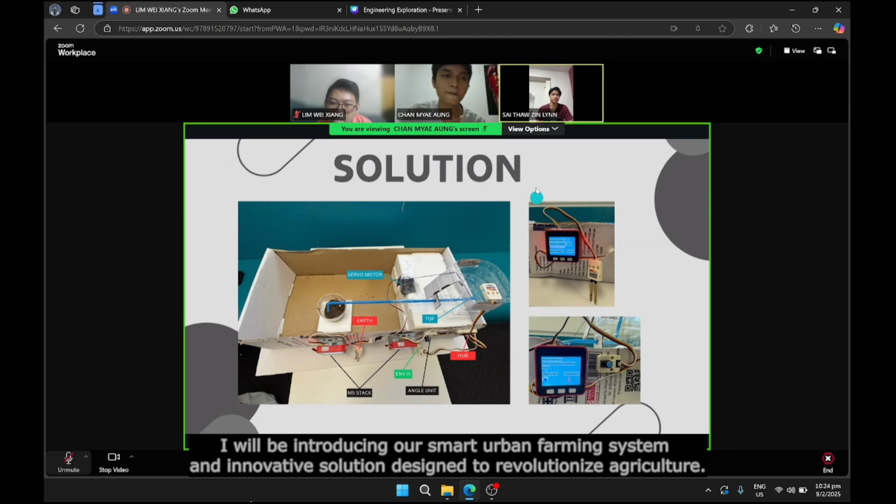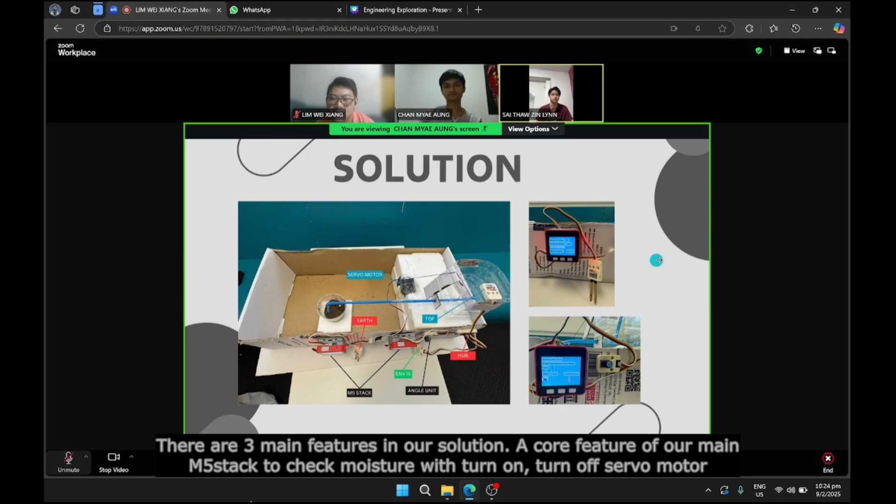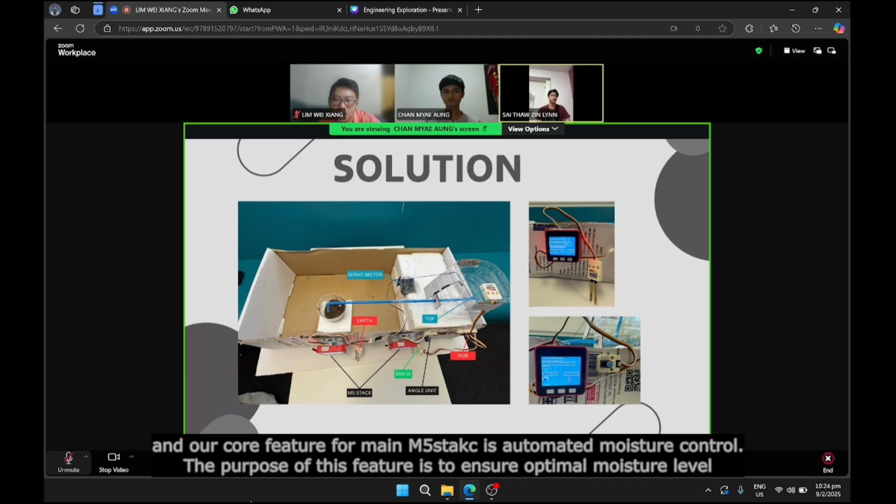Okay, now I'll be introducing our smart urban farming system, an innovative solution designed to revolutionize agriculture. So there are three main features in our solution. A core feature on the main M5Stack to check moisture with the servo motor. On the second M5Stack, we can check water level and adjust temperature depending on the moisture value received from the main M5Stack. And our core feature for the main M5Stack is automated moisture control. The function of this feature is to ensure optimal soil moisture levels by automatically activating or deactivating the water motor.

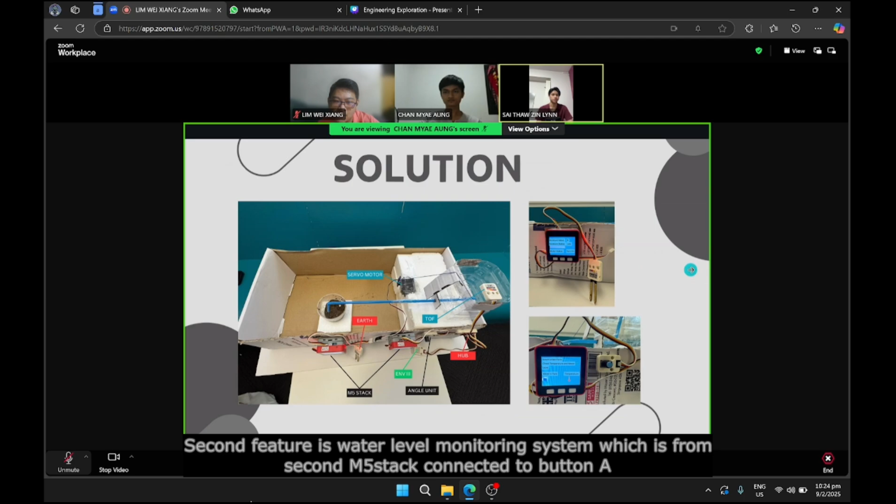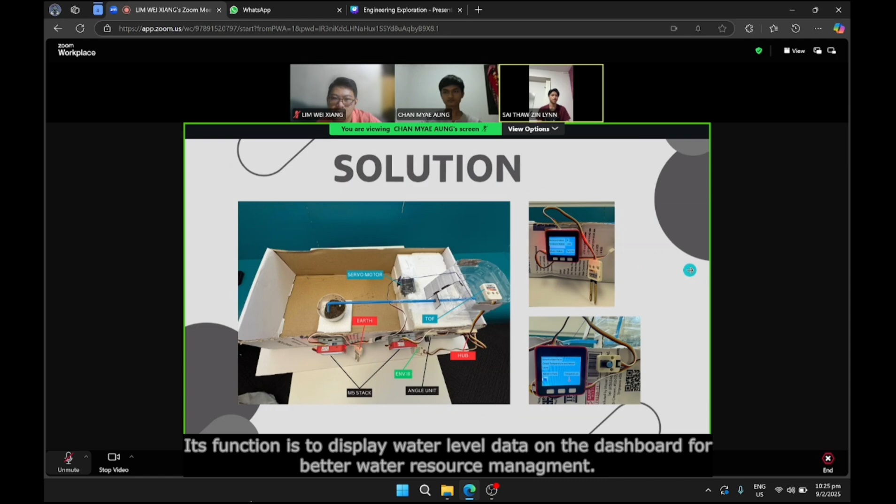Second feature is the water level monitoring system, which is from the second M5Stack. We can connect it with button A. Its function is to display water level data on the dashboard for better water resource management. And last but not least, we have the adjustable climate control feature, which is also from the second M5Stack, connected with button C. This will adjust farm temperature manually based on moisture data received from the main M5Stack.

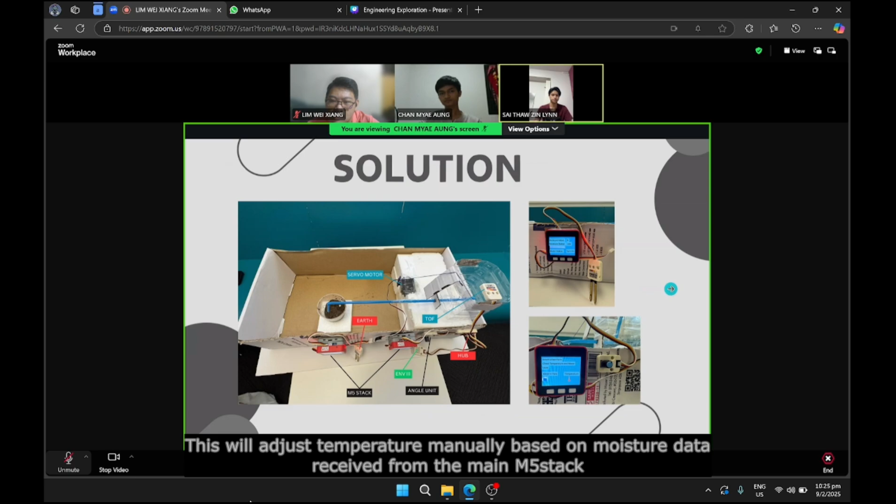So let's see what components we use for the project. We have two M5Stacks, the main M5Stack and secondary M5Stack, and one earth sensor and one servo motor and one environmental unit and one angle unit. And the last one is the power hub. And then let's take a look at our solution in more detail. Our system consists of three key features: an automated watering system, a water level monitoring system, and an adjustable climate control system. So let's take a closer look at how each component works.

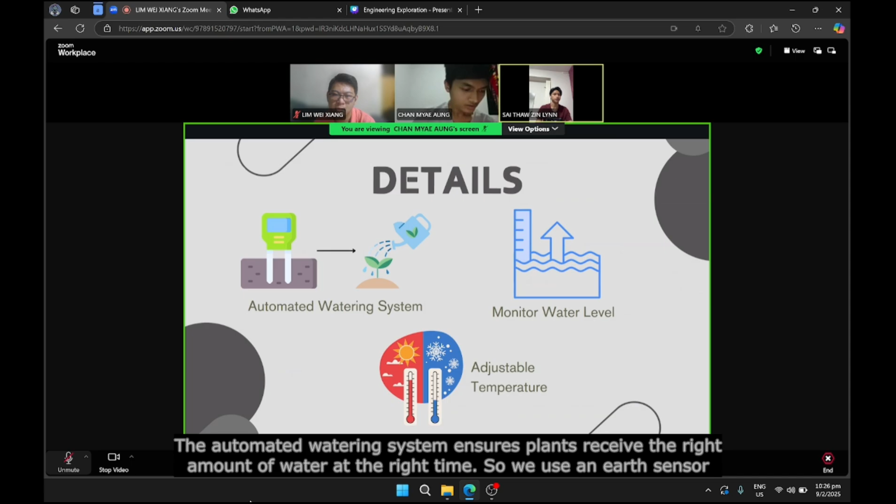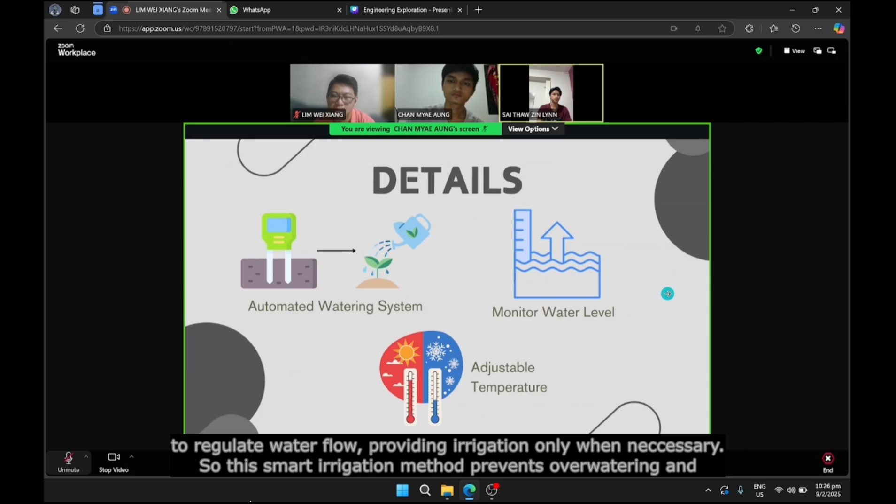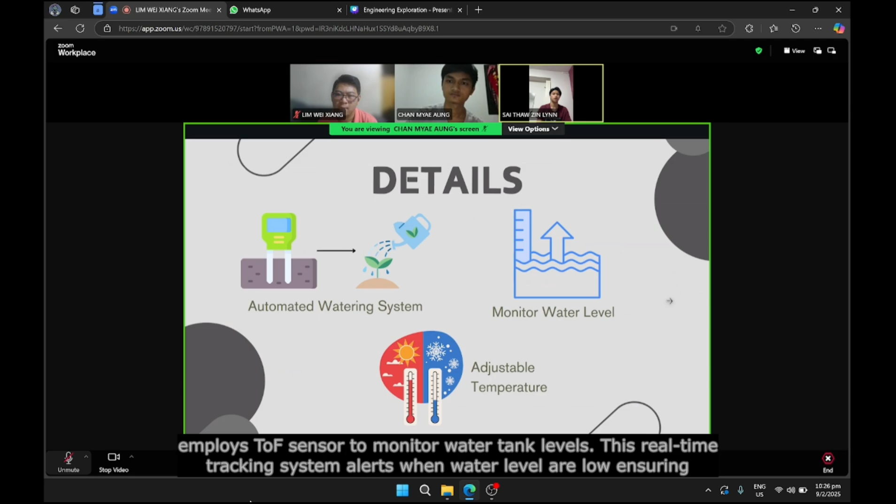The automated watering system ensures plants receive the right amount of water at the right time. So we use an earth sensor to measure soil moisture levels. When moisture levels drop below the required threshold, a servo motor is activated to regulate water flow, providing irrigation only when necessary. So this smart irrigation method prevents overwatering and conserves water efficiently. And the next one is the water level monitoring system. To maintain water availability, our system employs a ToF sensor to monitor water tank levels. This real-time tracking system alerts when water levels are low, ensuring optimal water management without waste.

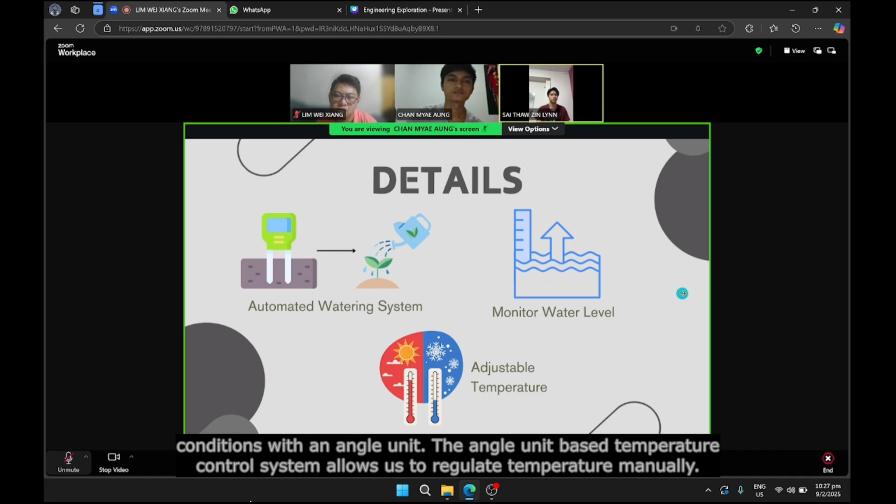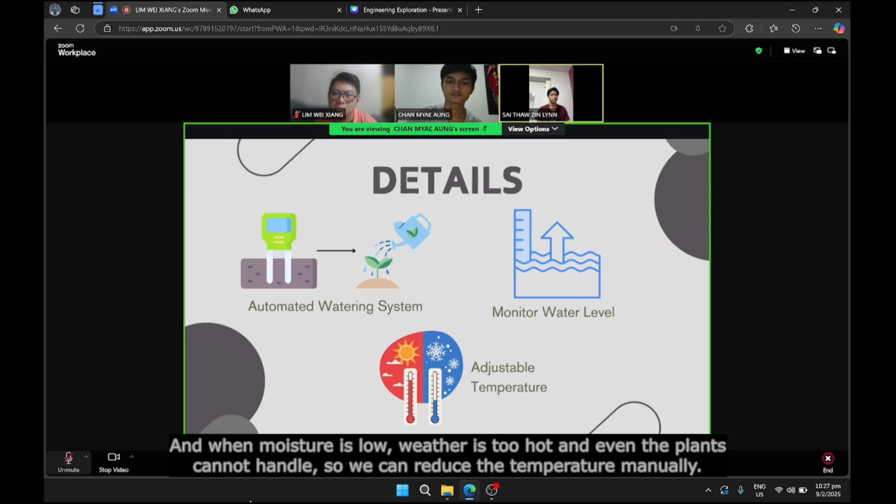And the last one is the adjustable climate control system. Our climate control system includes an environmental sensor to monitor temperature. Using this data, we can manually adjust the temperature conditions with an angle unit. The angle unit-based temperature control system allows us to regulate temperature manually. The system adapts based on plant moisture levels: when soil moisture is high, the temperature is increased, and when moisture is low, the weather is too hot, until the plants cannot even handle it, so we can reduce the temperature manually. So this balance ensures plant health while optimizing energy efficiency.

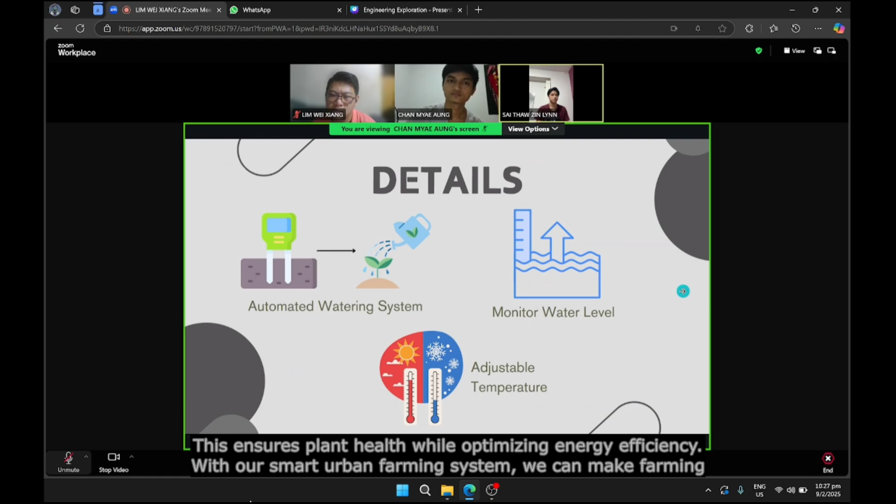With our smart urban farming system, we can make farming more efficient, sustainable, and productive, whether you're managing a small farm or a large scale plantation. So this system helps you save resources and maximize yield. And then Chan will present about the flow chart and the block diagram.

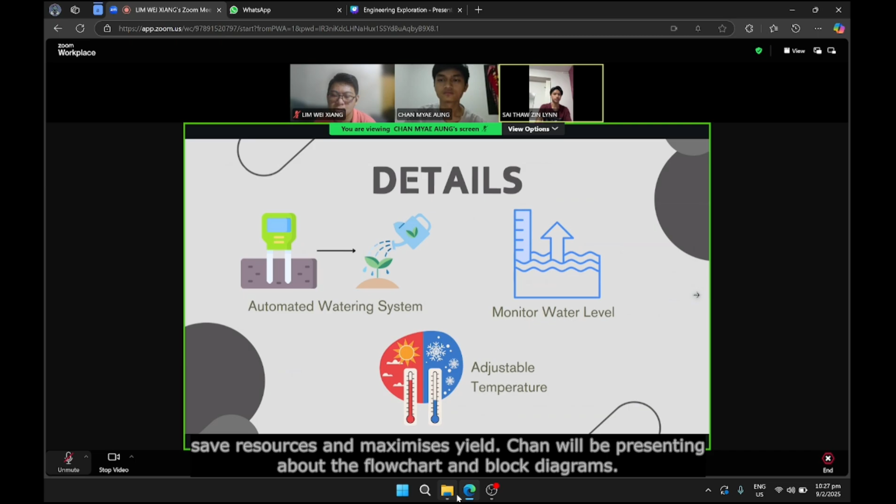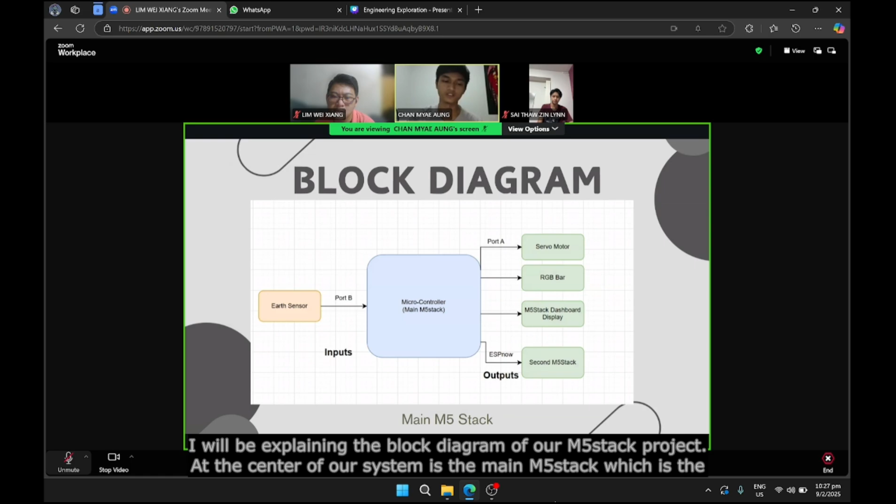Thank you. Okay. I will be explaining the block diagram of our M5Stack-based project. At the center of our system is the main M5Stack, which serves as the core processing unit. It receives an input and controls multiple outputs. So on the input side, we have a sensor connected to port B to measure the moisture level of the plants. And on the output side, we have a lot of components.

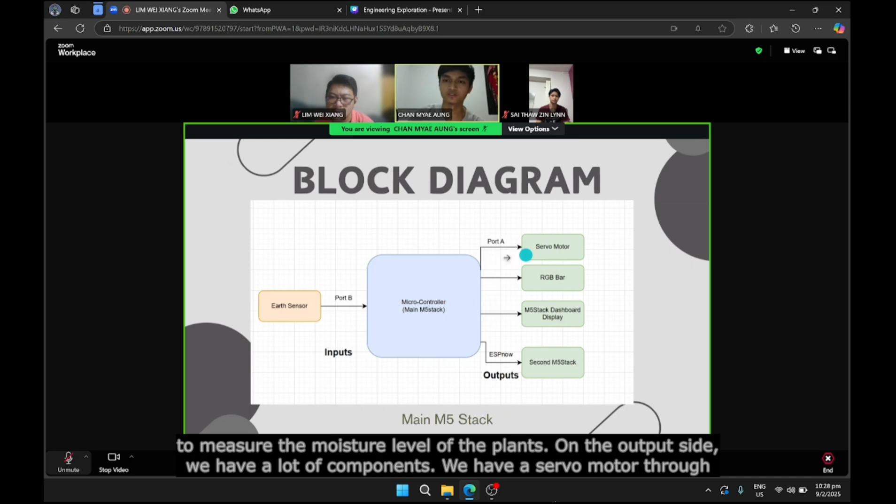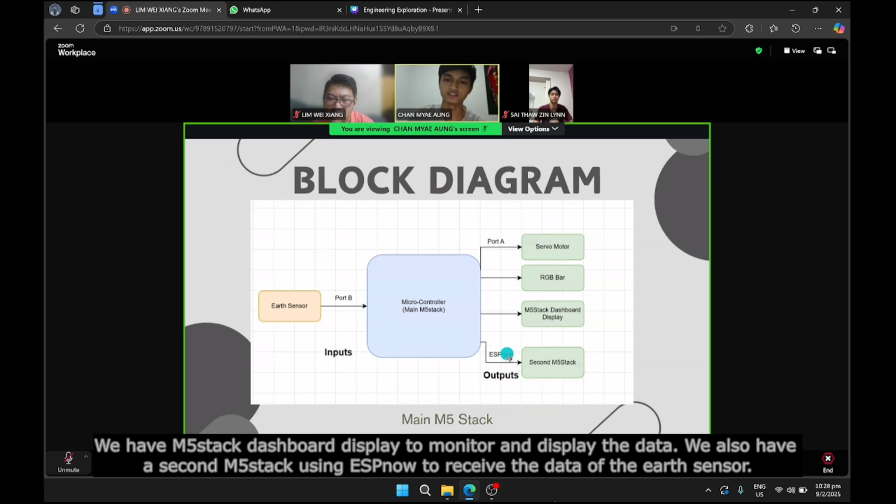We have a servo motor on port A to turn on and turn off our irrigation system. And we have an RGB bar to notify the user whether our moisture is low or high. And then we have the M5Stack display to monitor and display the data. And then we also have our second device that uses ESP-NOW to receive the sensor data. And then I will explain about the diagram of the second device.

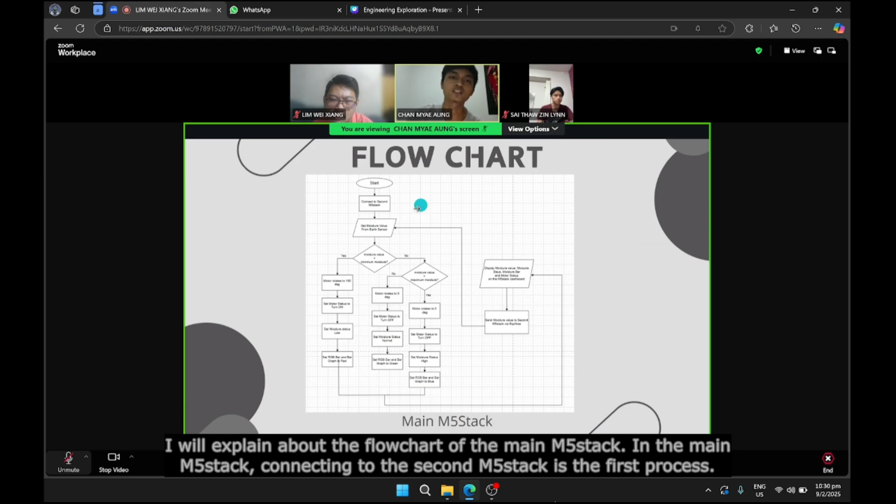In the main M5Stack, connecting to the second M5Stack is the first process. After that, we'll get the moisture value from the sensor, and then check if the moisture value is less than minimum moisture. If yes, the motor rotates to 180 degrees, the motor state turns on, and then we show the moisture state low, and then notify the user using the RGB bar and bar graph being red.

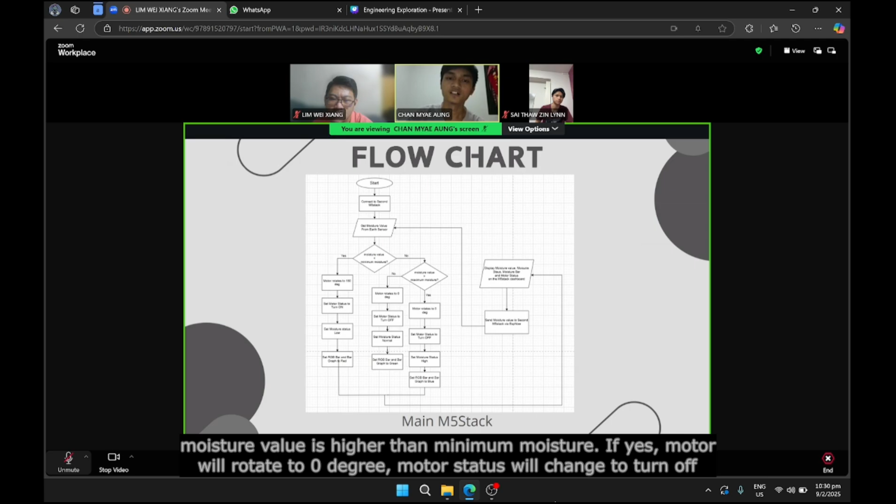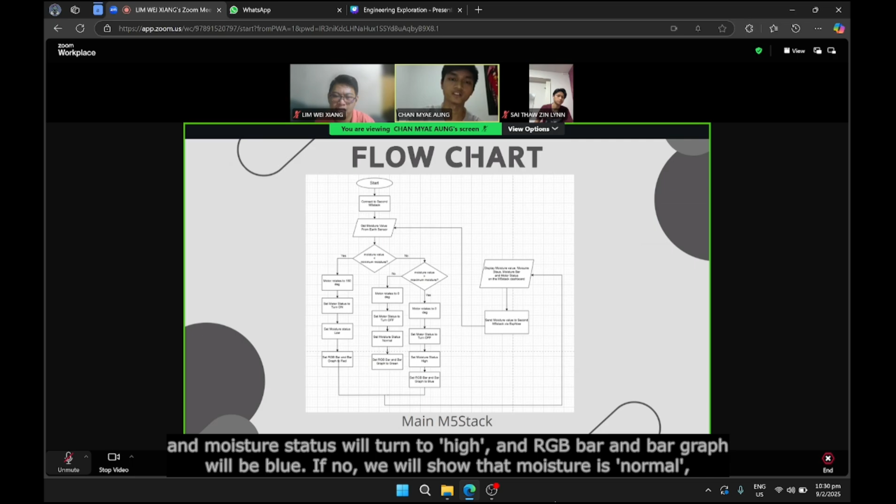If the moisture value is not below minimum moisture, we will check if the moisture value is higher than maximum moisture. If yes, the motor rotates to 0 degrees, the motor state will be turned off, the moisture state will be high, and then the RGB bar and bar graph will be blue. If not, we assume that moisture is normal. So we turn off the motor, the motor rotates to 0 degrees, and the moisture state will be normal. And then the RGB bar and bar graph will be green.

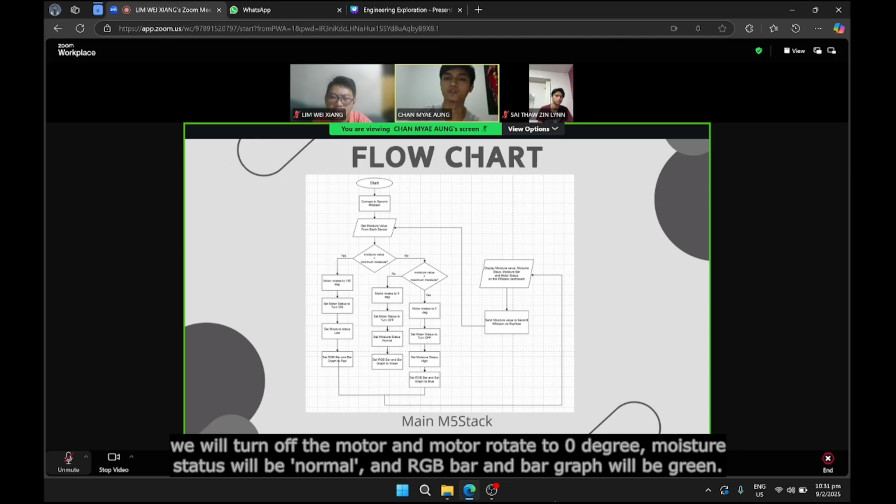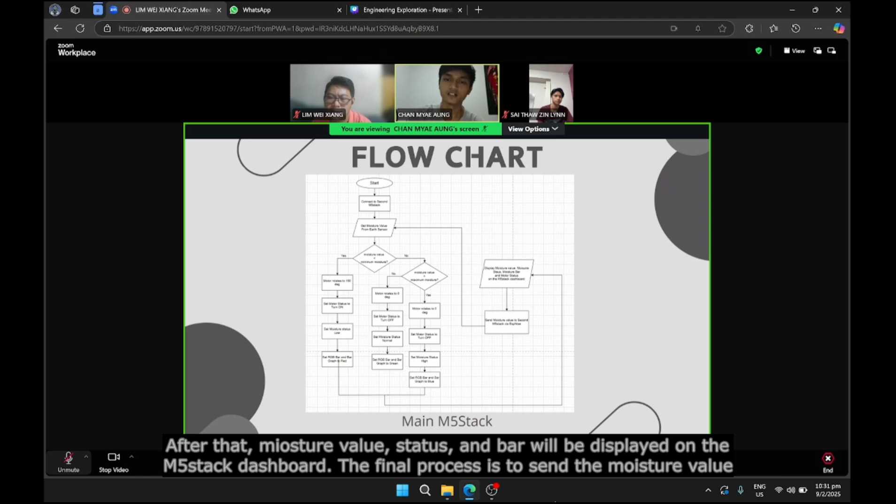After that, the moisture value, moisture state, moisture graph, and motor state will be displayed on the M5Stack dashboard. The final process is sending the moisture value to the second M5Stack by ESP-NOW. And then there's the flowchart of the second M5Stack.

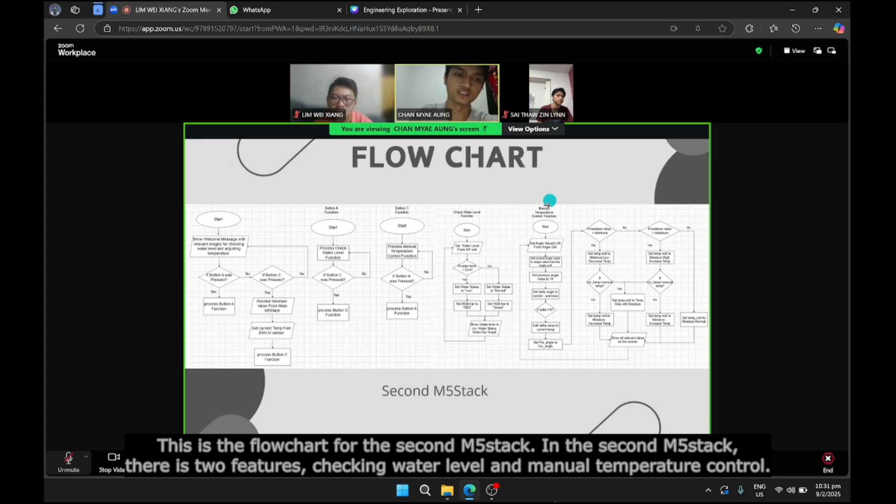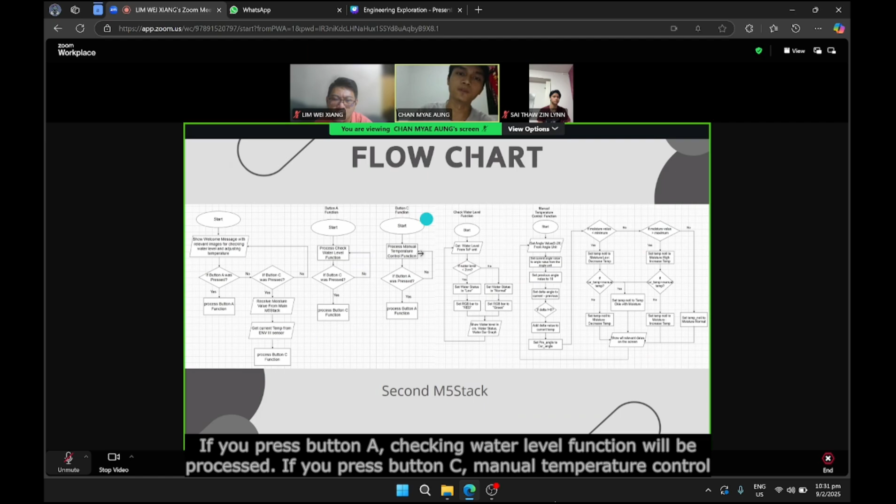In the second M5Stack, there are two features: checking water level and manual temperature control. So if you press button A, the checking water level function will be processed, and if you press button C, the manual temperature control function will be processed. So let me explain the details of the two functions. So firstly, the checking water level function. Getting the water level from the ToF unit is the first process.

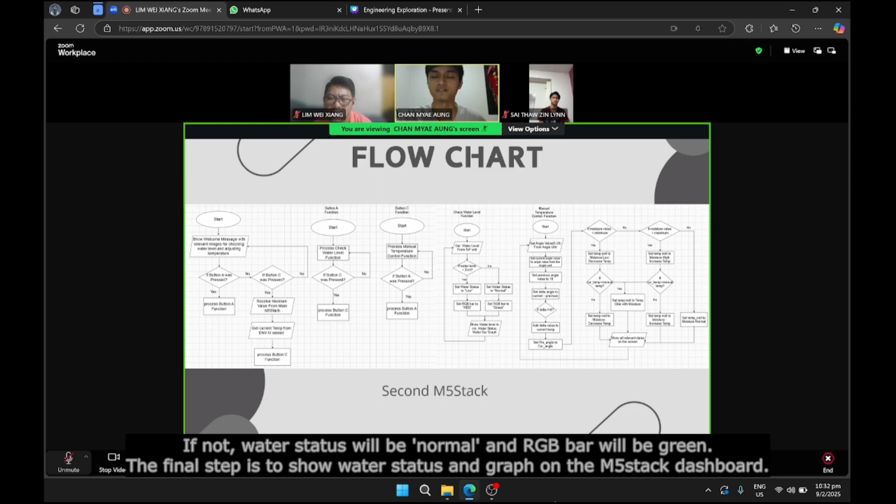So if the water level is less than 2 cm, the water state will be low, and then the RGB bar will be red to notify that the water level is low. If not, the water status will be normal and the RGB bar will be green. So the final step is the water level, water status, and water graph will be shown on the main M5Stack display. So after that, let me explain about the manual temperature control function.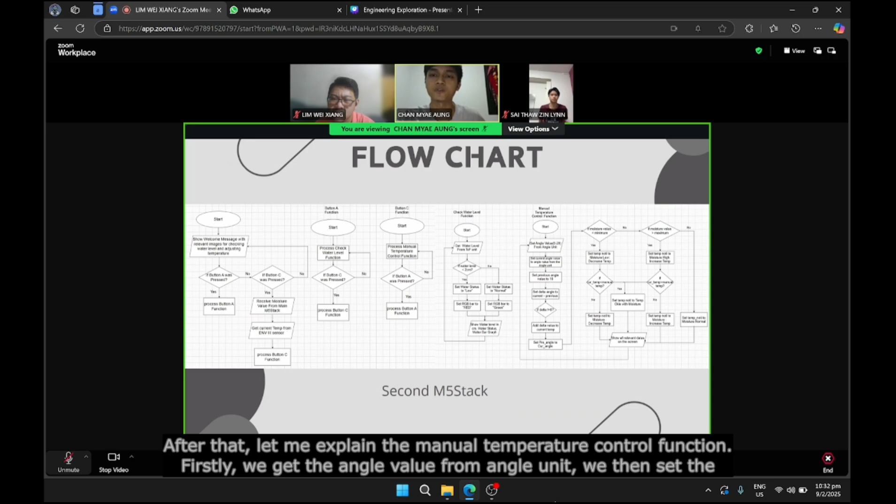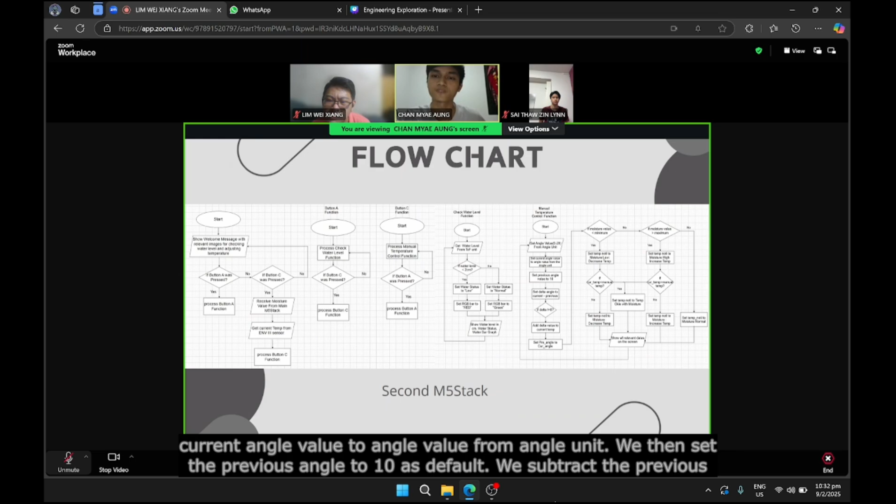So firstly, get the angle value of 0 to 20 from the angle unit, and then we will set the current angle value to the angle value from the angle unit, and then we set the previous angle value to 10 as a default mode. And then we will set the angle by subtracting the previous angle from the current angle.

So if the changing angle data is not equal to 0, we will add the data value to the current temperature, and then we will memorize the previous angle as the current angle. After that, we'll check the moisture value also.

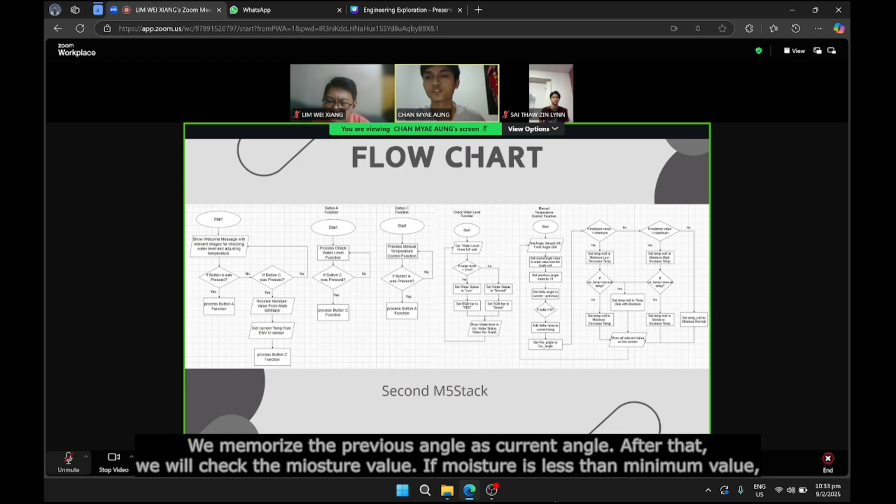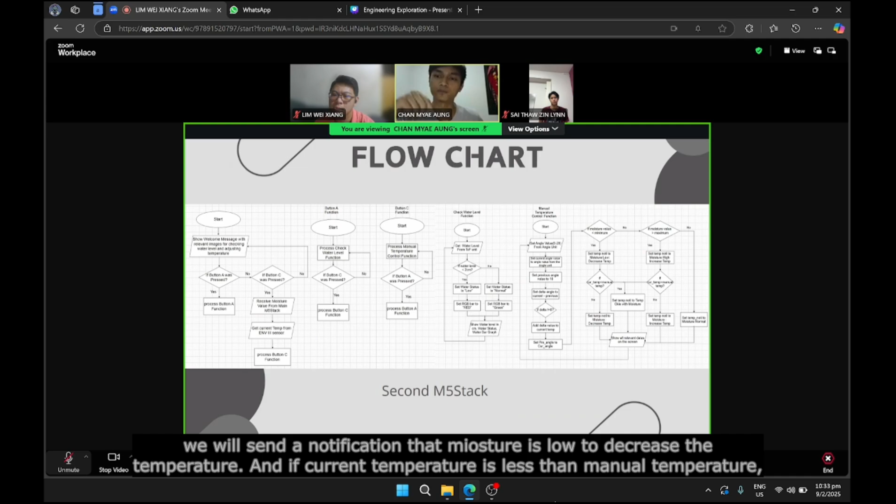If moisture is less than the minimum value, we will set the notification like moisture low, decrease the temperature. And then if the current temperature is not less than the manual temperature, we will keep notifying moisture low and to decrease temperature. If not, we will change the notification to temperature okay with moisture.

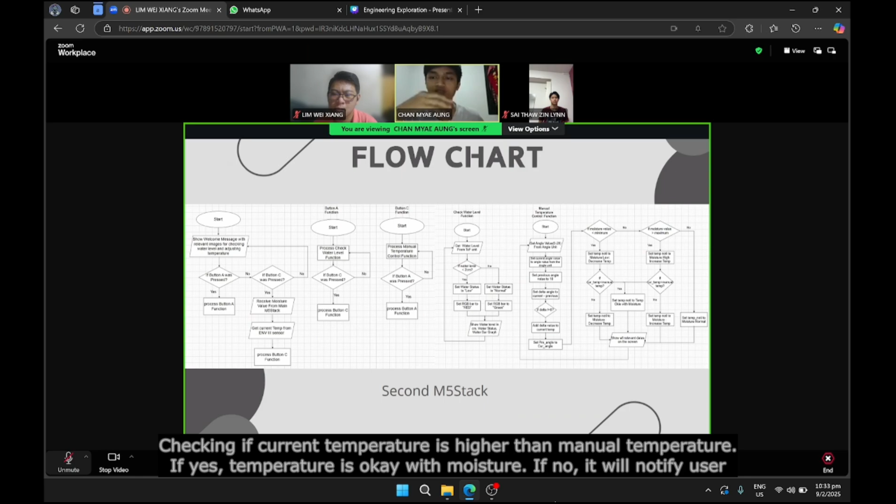And then if moisture is not less than minimum, we will check if the moisture value is higher than maximum. If yes, we set the notification to moisture high and increase temperature, and then check also if the current temperature is higher than the manual temperature. If yes, temperature okay with moisture. If not, keep notifying the users moisture high and to increase the temperature. If not, then we are sure that moisture is normal.

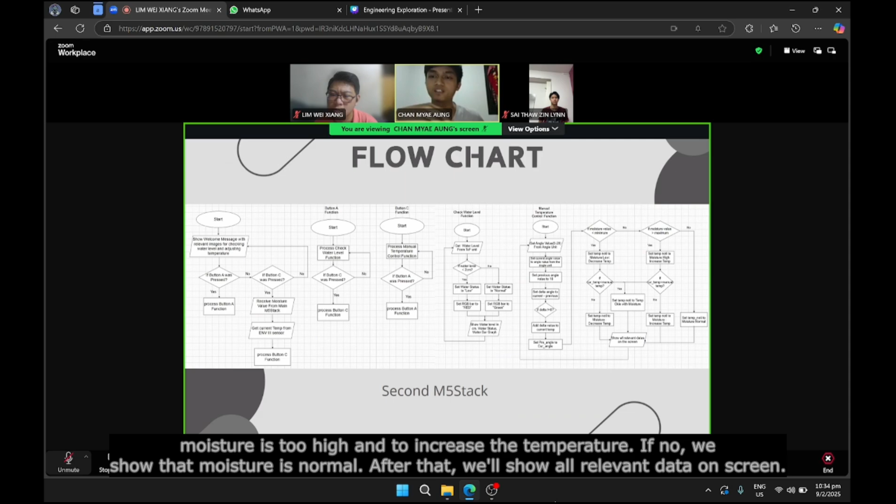After that, I show all the relevant data on the screen. That's all about our flowchart. And then let's see our live demonstration, the demo.

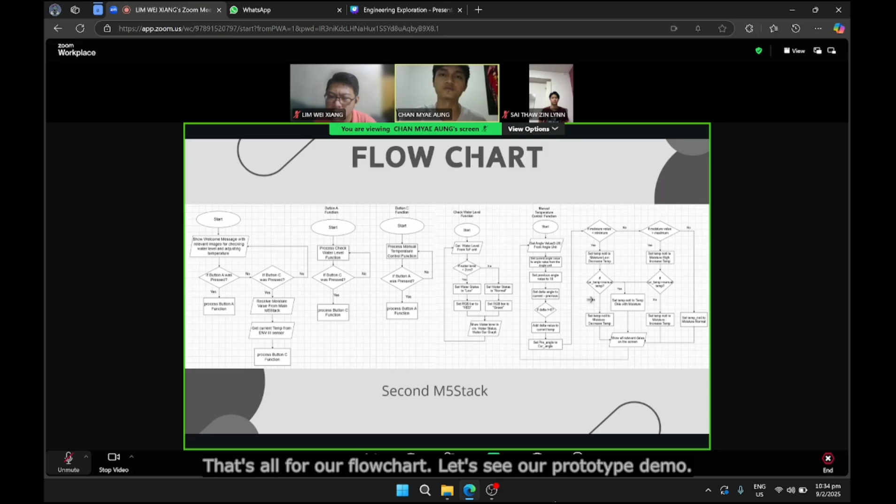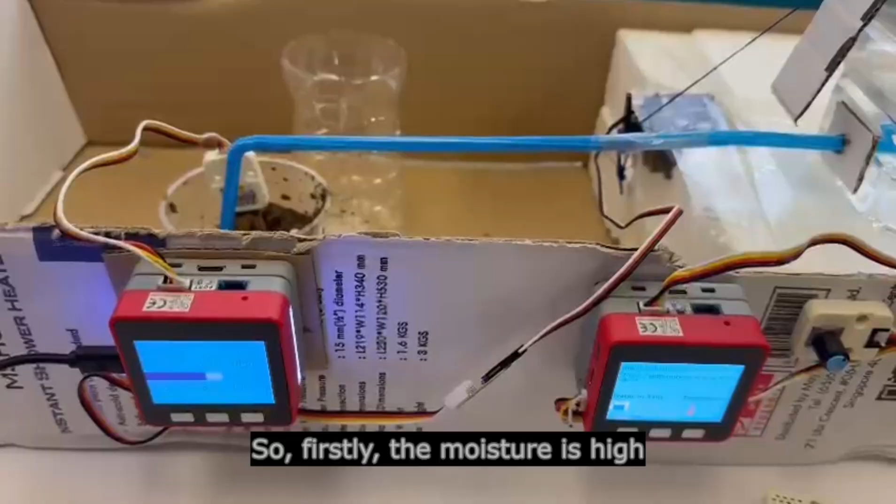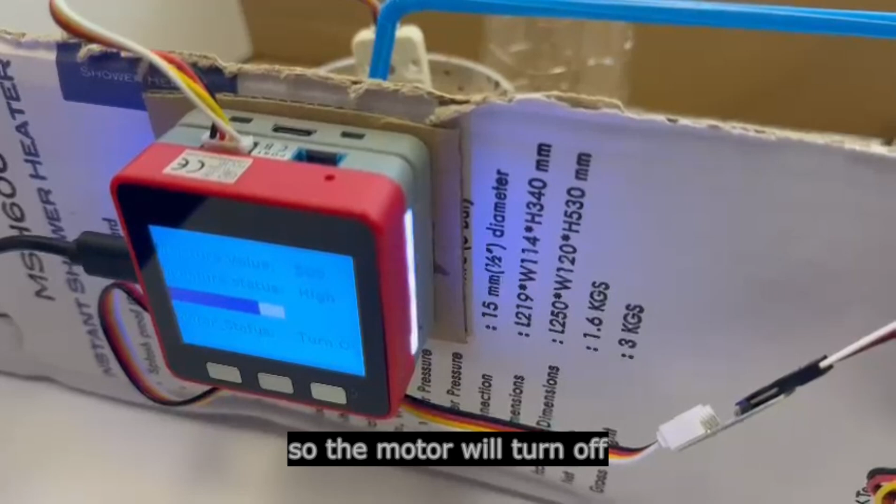Hello, I'm Sai. Now we're doing the prototype for demonstration. So I demonstrate the moisture, the main feature. So firstly, the moisture is high, and then the RGB bar will turn blue because of the high moisture indicator. At that time the motor will turn off to avoid excessive hydration.

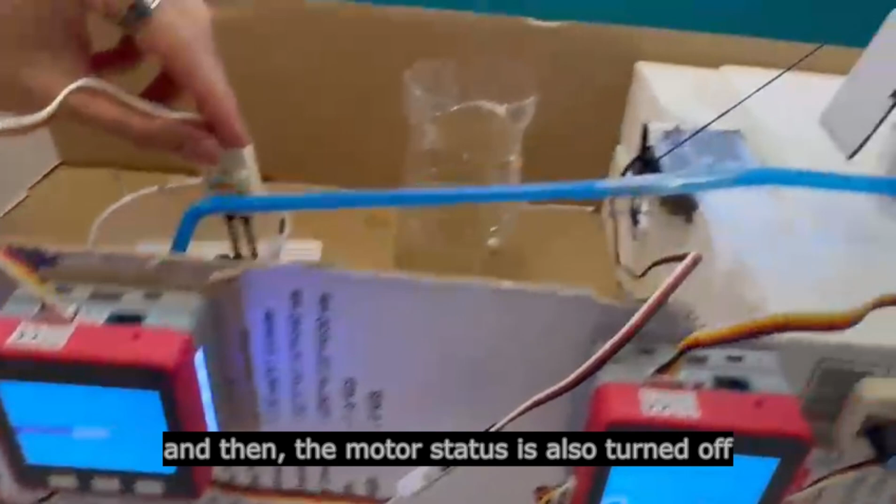Okay, right now the moisture is normal, so the RGB bar will turn green, and the motor status also turns off like when the moisture is high. So it just indicates optimal moisture, so we can conserve water and prevent overwatering.

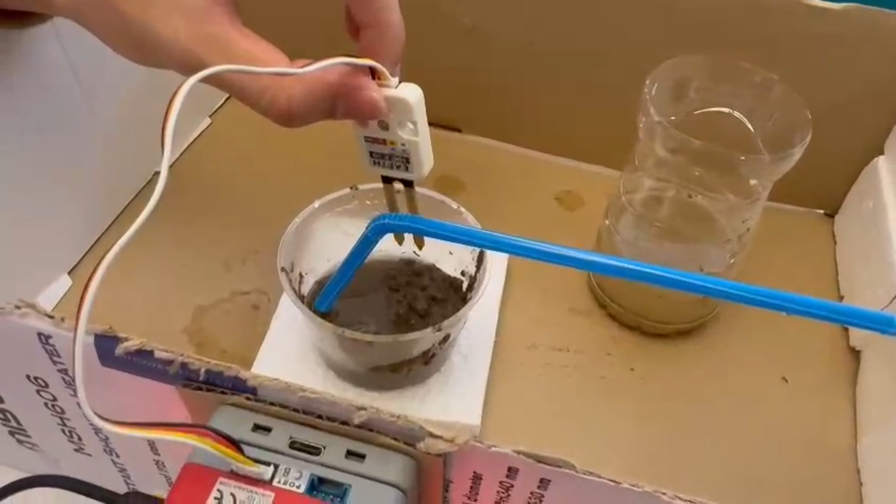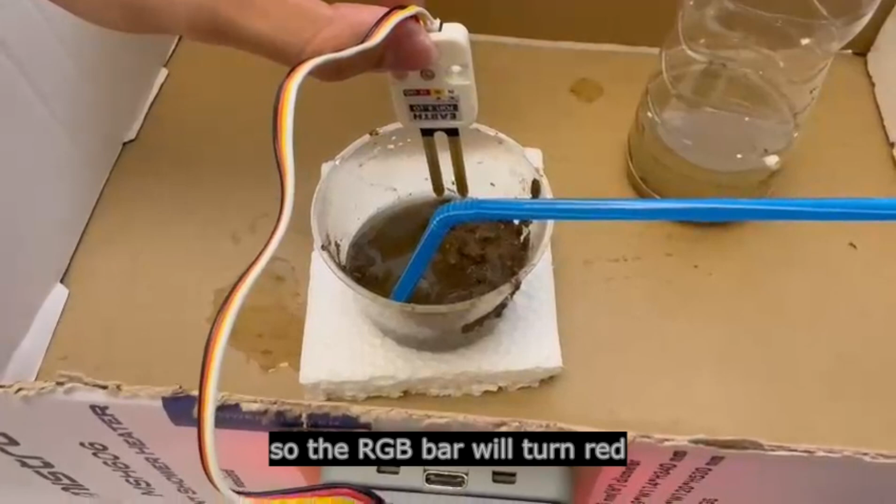And then the last one, when the moisture is low, the motor will turn on, and the water will flow here. So we can water the plant and ensure sufficient moisture for higher productivity. The RGB bar will turn red because of the low moisture warning. So the water will flow here. When I put it down, the moisture status will turn to high. So that is the moisture feature.

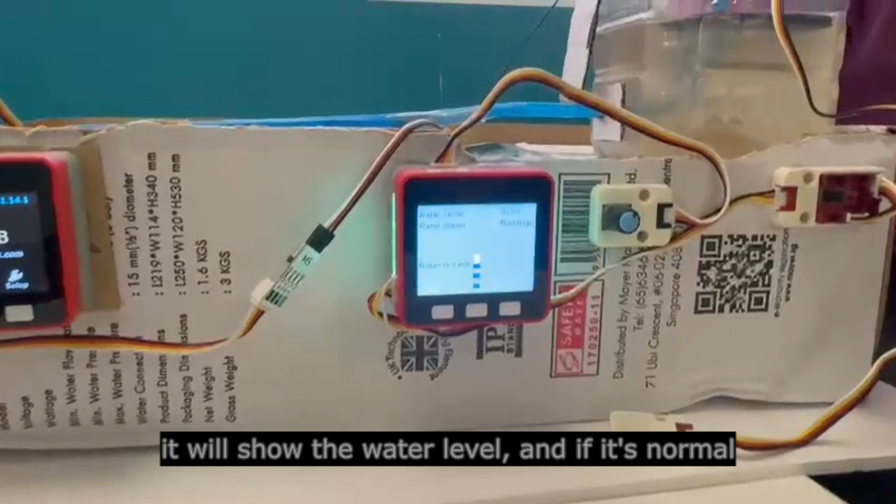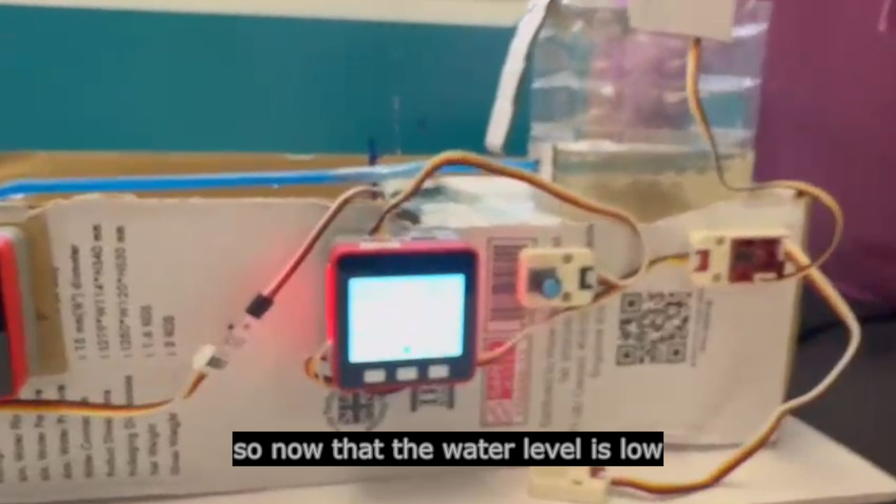Okay, thank you. Now I'll be showing our second feature, which is to monitor the water level. If I press the button here, it will show the water level, and if it's normal, about 5 cm, it will show a green LED, as you can see, normal water. Okay, so now the water level is low, and it will show through the status as well as the LED turning red.

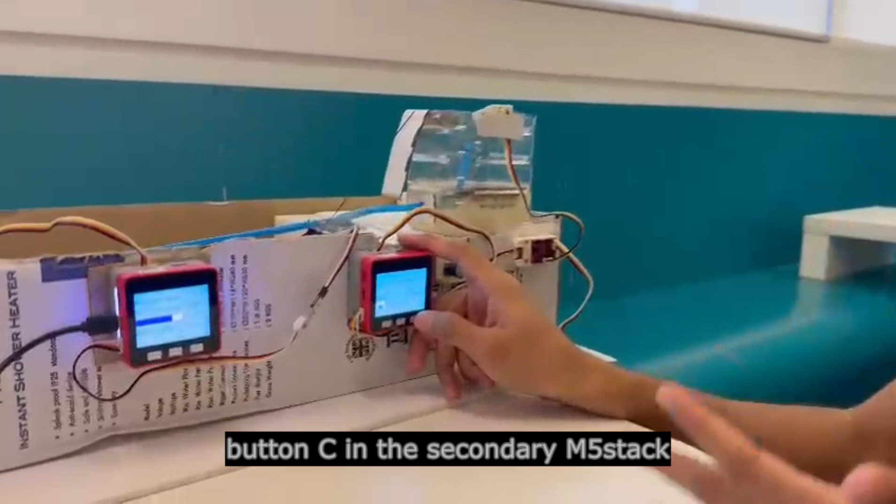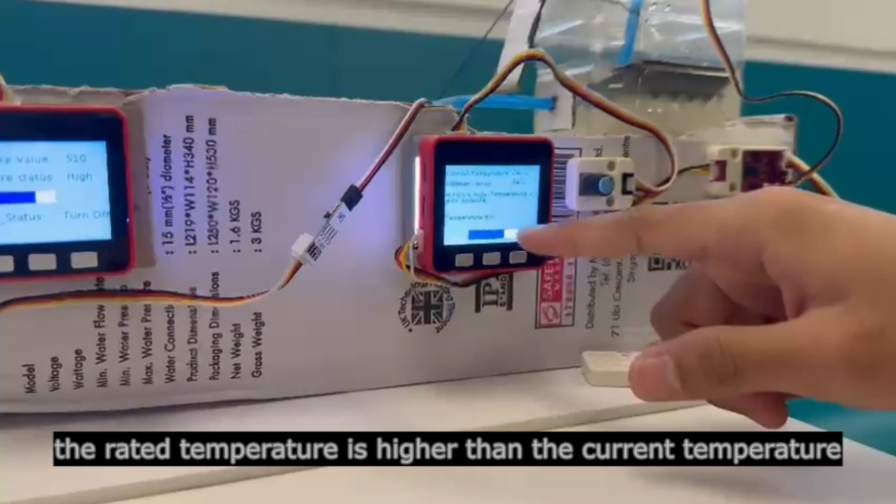Hello, my name is Channel. I will be presenting our last feature, adjusting the temperature with the moisture received from the main M5Stack. To adjust the temperature, we need to press button C. When we press button C, you see the moisture is high, and now the rated temperature is higher than the current temperature. So the temperature is okay with the moisture, and the main M5Stack also shows moisture high. We receive the moisture data from the main M5Stack by using ESP-NOW.

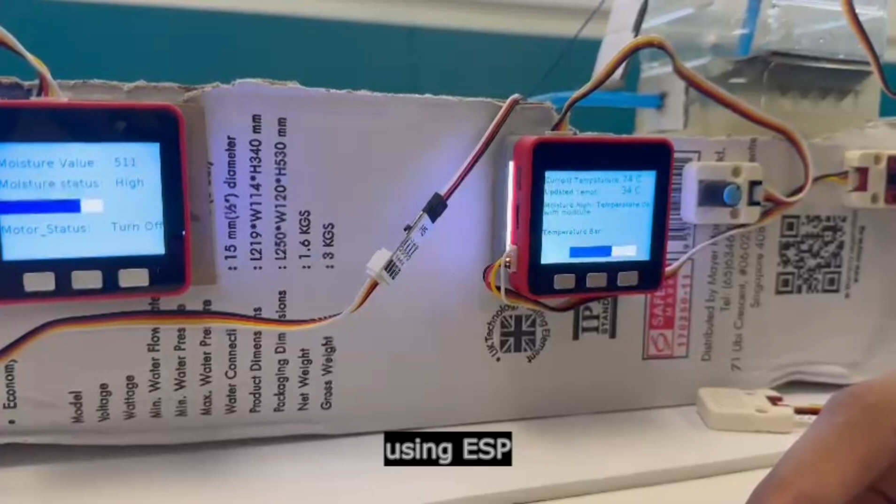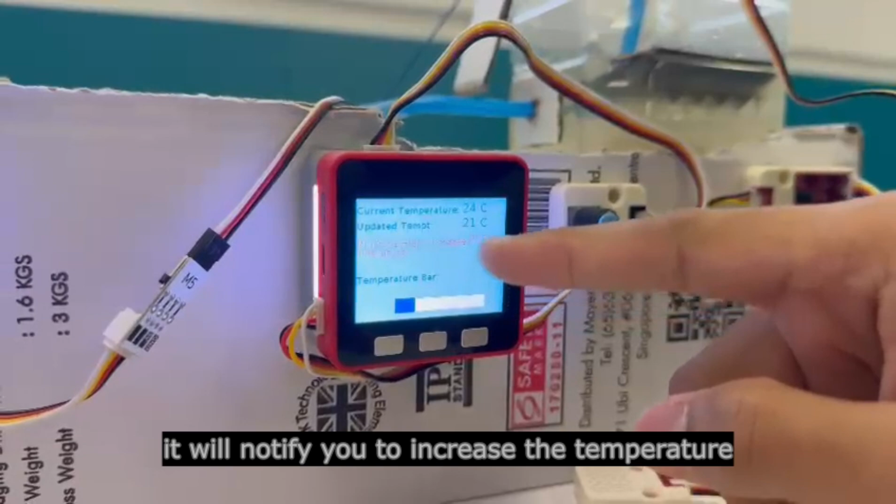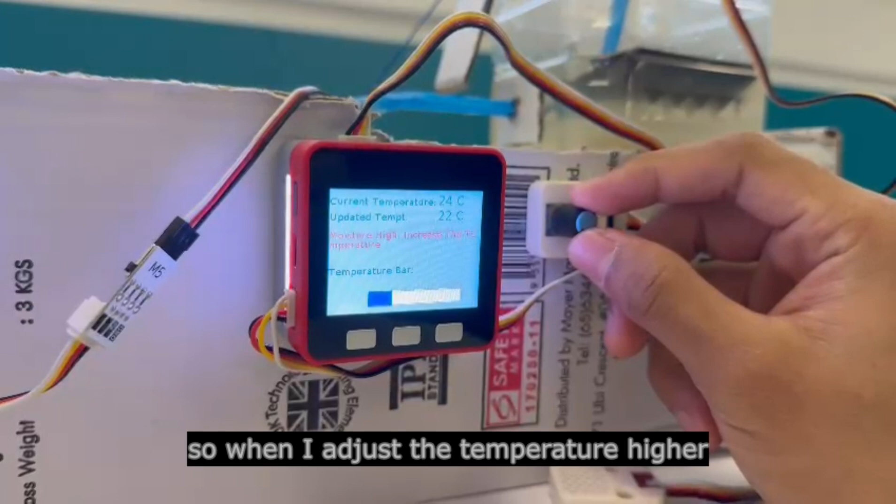So when I adjust the temperature lower using the angle unit, it will notify you to increase the temperature because moisture is very high. When the temperature is high, it will affect the plant growth. Okay, so when I adjust the temperature higher, it will change to temperature okay with moisture.

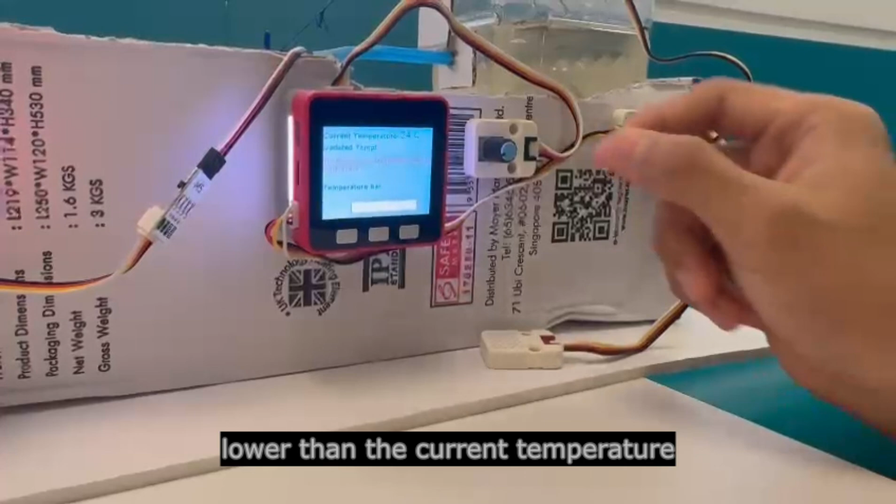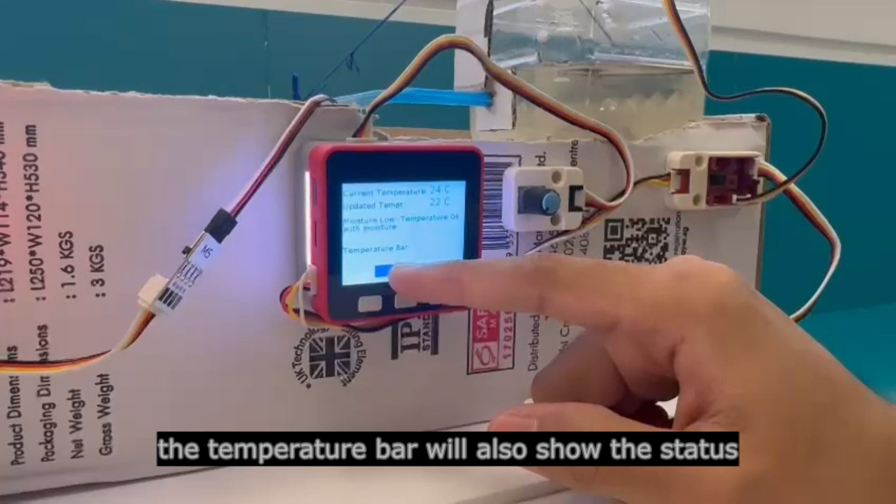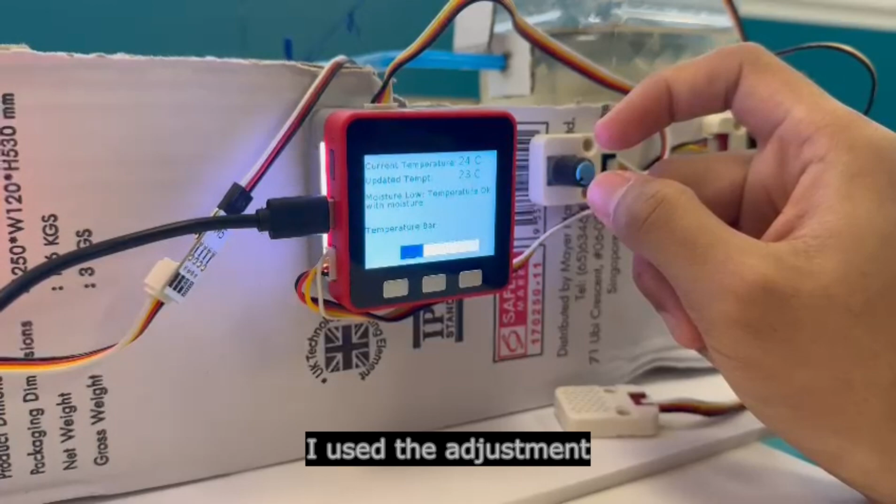It's okay. So when I adjust the temperature to be higher, it will notify to decrease the temperature. So I need to lower the temperature using the angle unit, and it will show temperature okay with moisture. So adjusting the temperature with the moisture will save our energy. That's why we call it sustainable urban farming.